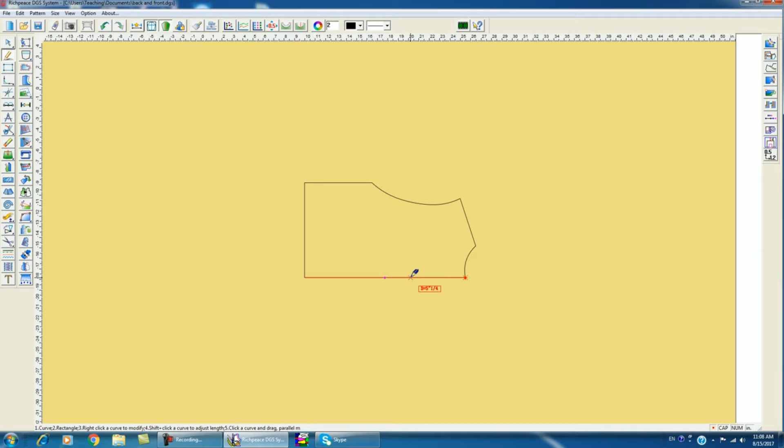First of all, we need to make a new neck, so with the tool F key, we need to copy this line and move up. Hold down the line until you see two parallel curves, then type in 3.75 and press enter. Now we need to connect this line up to the shoulder line.

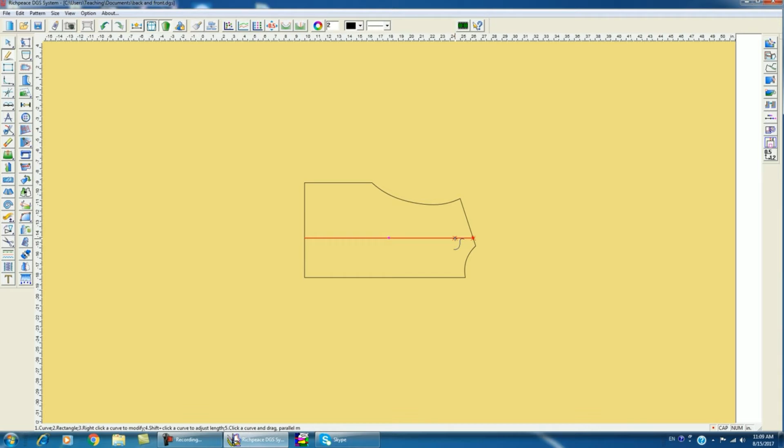Select this line and click, then right button to finish. Then we need to draw again the neckline. Put the cursor here, not here, here, type 1.75, enter. Now it is S. We need to change it to T by pressing right button, then you click here.

Now we want to make a neckline, so connect this point and make an S, connect this point, then press right button, put your cursor here and make a right button. Then it changes to the curve tool, click and move, and you can make the neck curve. If you are satisfied, press left button at any other place, then you are done.

Second thing we need to do is extend this center line up to 17.5. This is the first time to teach you this tool.

Put your cursor near this reference point, and by pressing shift key and at the same time press right button, it will show a dialog box to adjust the curve. The new length, as I told you, should be 17.5, and press enter.

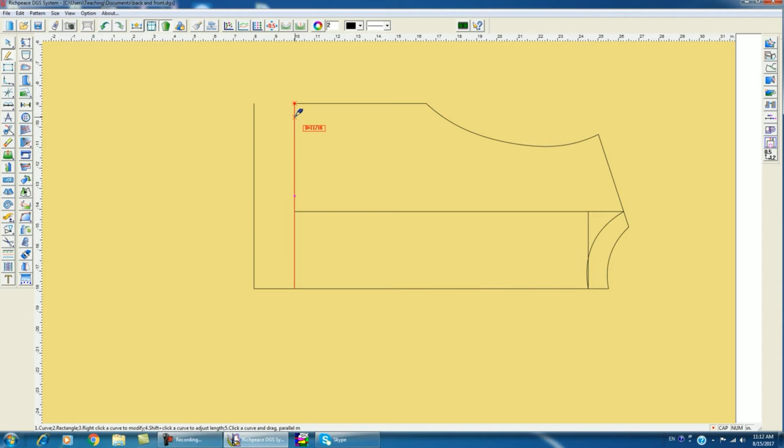Third, we need to make this one a little bit shorter. Same thing - put your cursor near the reference point, press shift key and make a right button, you will see the dialog box. Now we'll make 8.75 and press OK.

Now we make the tank top shoulder, so we need to make it shorter. But before that, we need to remove unnecessary lines. Drag these two lines, press delete key, and here we delete, and here we clear the corner inside and make a right button to remove this part. Drag until inside to remove this part, and press right button.

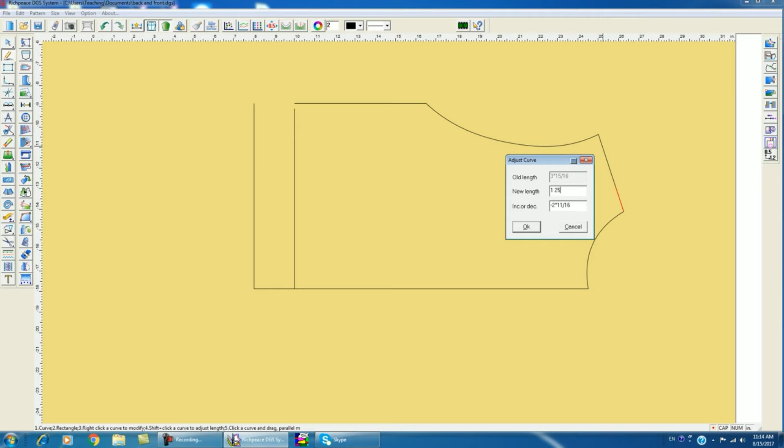At this moment we can make this shorter, and the moving point, the reference point should be here. Put your cursor near the reference point, press shift key and make a right button. It will show a dialog box. Then type in 1.25 at new length and press enter.

Then it became shorter. Now we need to draw from here. Make a T, and the distance should be 9.5. Press enter.

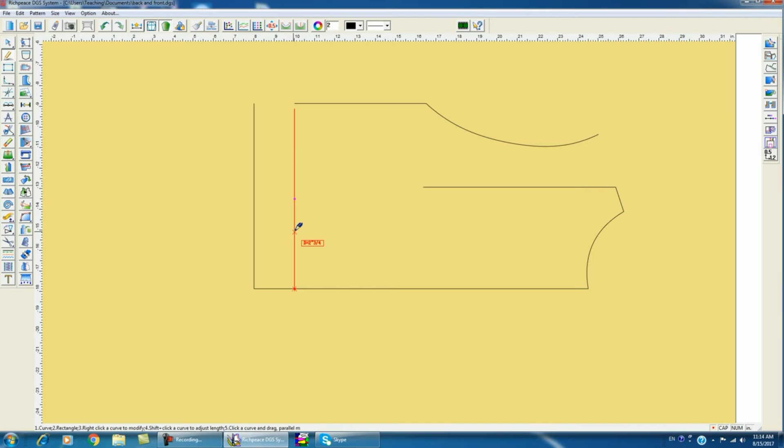Now we need to make a copy of this one, so we need to move this way, and you snap here. Press enter.

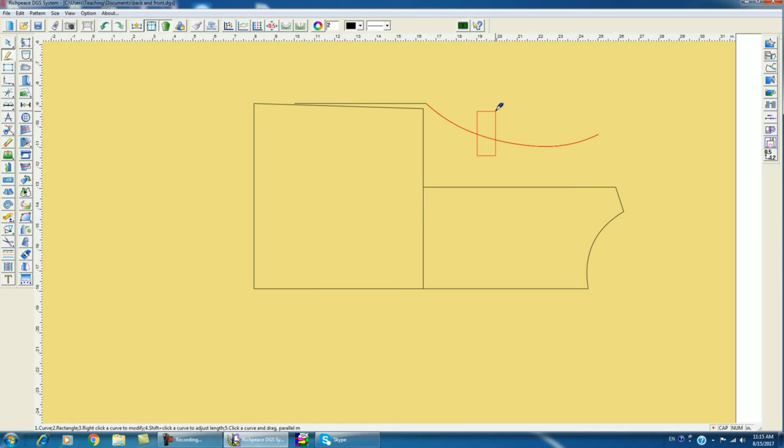Now we need to connect this line to here, click, make a right button. Actually you don't need this line anymore, so select and delete key here, select and delete key, select and delete key.

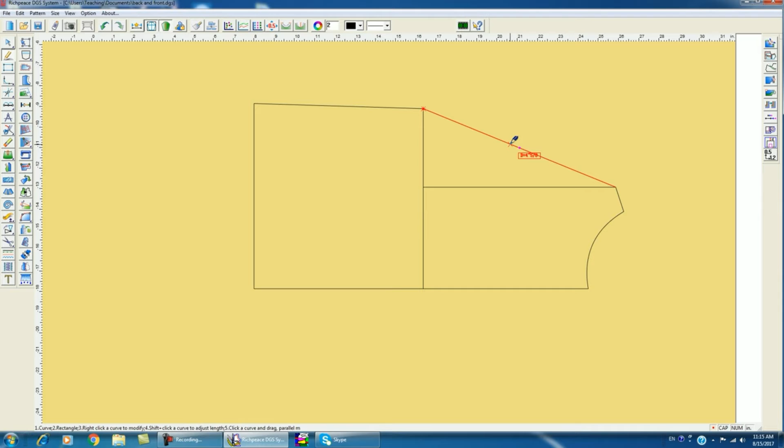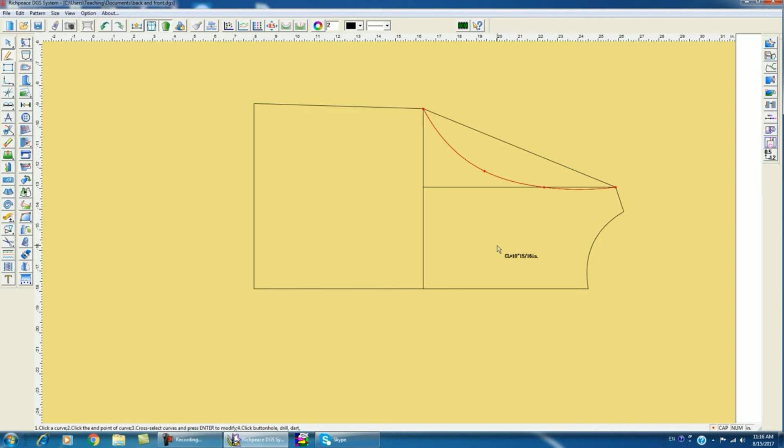Now we need to make a new armhole, so we connect this one and this one, and press right button. To make a curve according to this line, press right button and click and make a curve. You can use 2 or 3 points to make the curve as much as you want. If you're done, press left button at any other location.

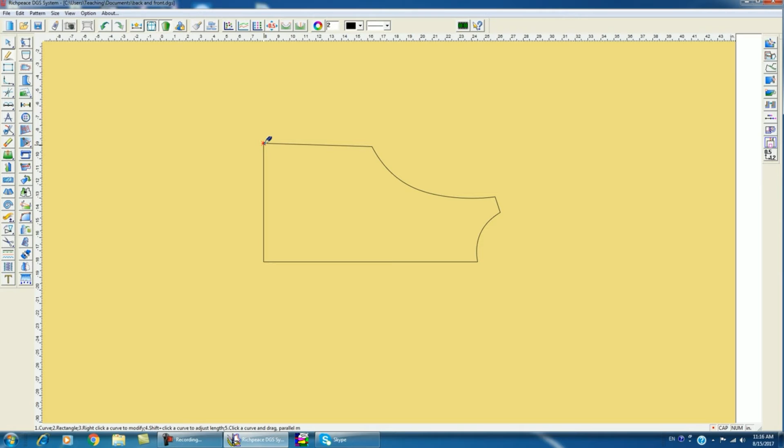We need to remove this line, select and press delete key. Then now you have this one, and also we need to move this point around 1.5 inch to the right.

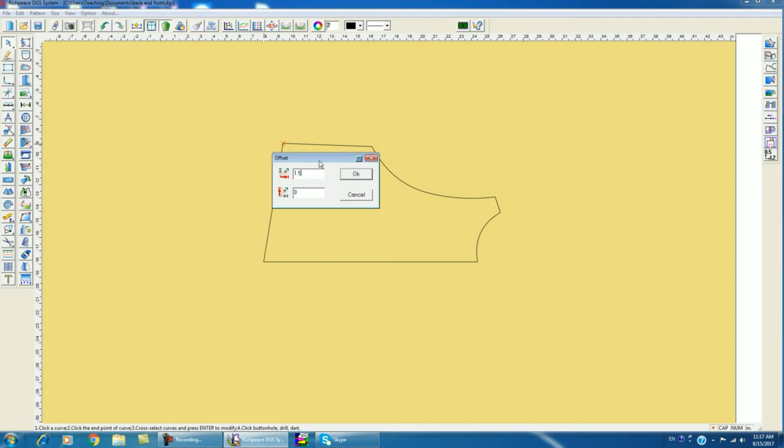We need to change to the A tool, put the cursor on here, press enter. Then it will ask how much the point should be moved. At the X direction, 1.5, and you can see before you press OK. If it is correct, then press enter or press OK.

Now we need to make a curve here, so it is already the tool - just click and one more click and make a curve.

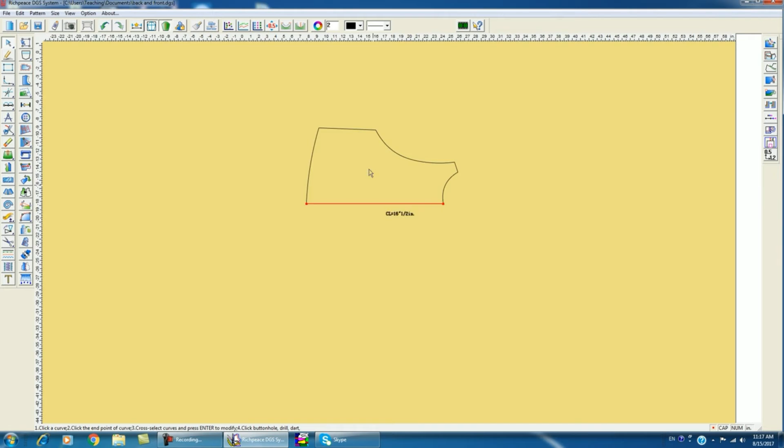And that's it. Okay, and with this one I want to make a pattern piece. To make a pattern piece, use the T tool, select the whole piece, and the color will change to gray.

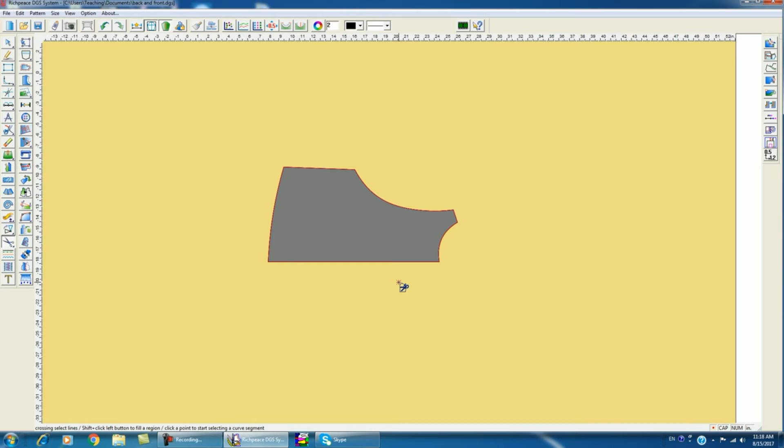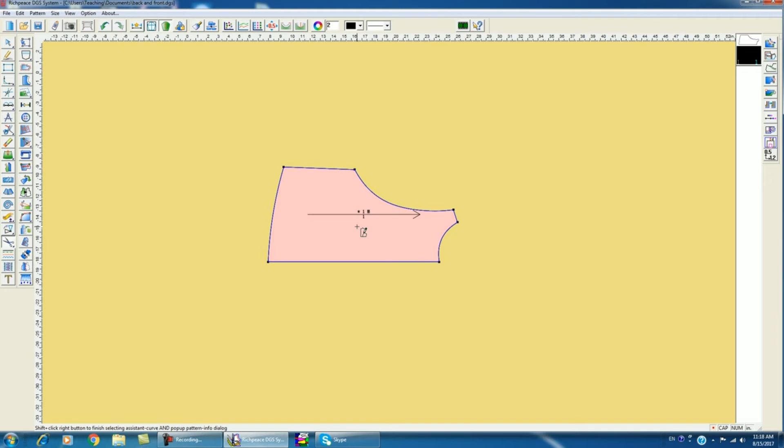Then you press the right button to finish, it turns orange, and you put the cursor on this piece and hit the space bar. It changes to the hand shape. Just move the cursor, don't press anything, and the piece will be attached to the mouse so you can move it anywhere you want.

With this one I want to show you two things today. One is to unfold. If you look at the toolbars, there are two lines of toolbars on your left side. The leftmost one is mainly for the design. You can still use some of the tools for your patterns, but most of them will be used for the design.

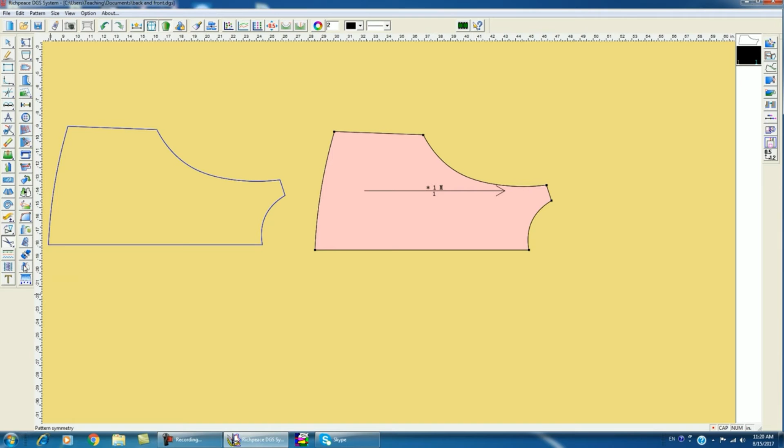The next one, these tools are almost all for the pattern - modify, seaming, grain line change, whatever. So today I want to show you two tools only: the right side tool, and from the bottom, the second one, called pattern symmetry.

The shortcut is Shift X. Click this one and it will show you three options. If you click the first one, and then click the symmetry line, it unfolds.

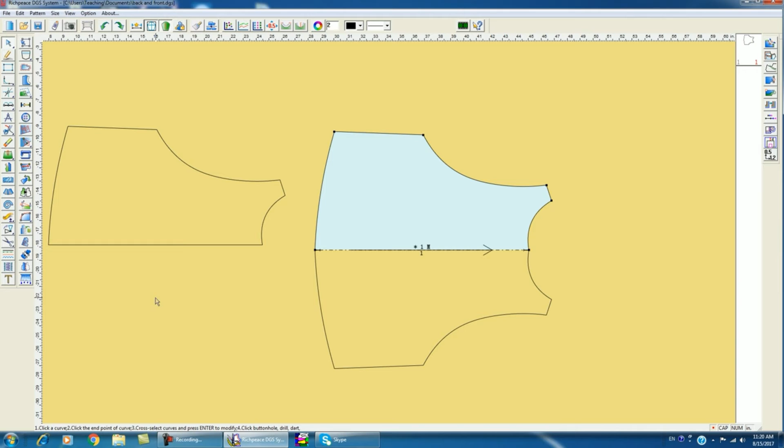This is good for two changes at once. For example, if you change the top part, the bottom part will be changed also at the same time. So I'll undo, and the first option is that one - unfold but symmetry unfold. So if you change the upside, it will affect the downside too.

Second one, this is to make a fold. If you click here, it shows the fold sign. There is an option called 'move grain line to axis,' so the grain line moves to this axis.

So if we open at the marking, the grain line should be at the center - that's why they use this option. If you don't like it, uncheck and apply, and then we can move this grain line anywhere. I'll do it again.

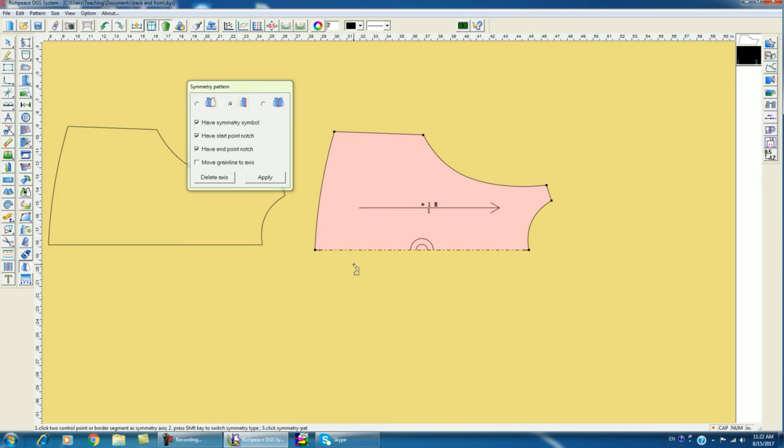If you don't check here, just click this one - the grain line stays here, and it just makes a fold sign. That was the second one. I'll undo, and the third option just opens it.

So if I click here, it opens. There are three options: one is unfold with the symmetric, the second makes a fold sign, and the third opens it regularly - it doesn't have any special function.

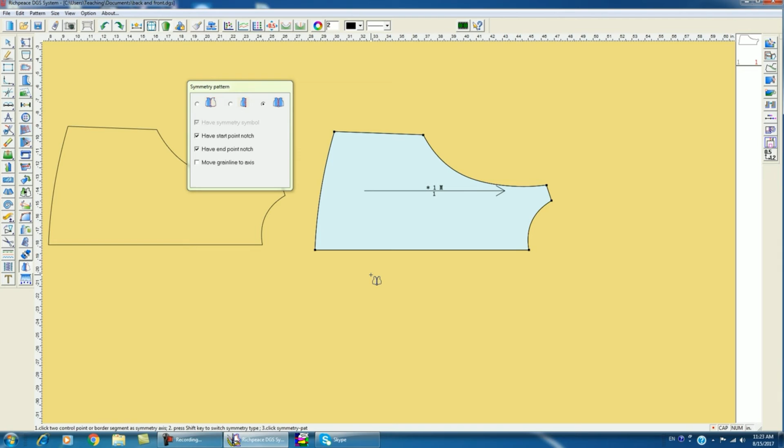Okay, just open. And the second one I want to show you is the Seam tool, shortcut S. If you press S and click any point - not the line - it will show you a dialog box and you type in 3/8, and it will ask whether to apply to only the selected pattern, all patterns of the work area, this area, or all patterns of the style.

There's only one pattern here, so it doesn't matter which option. If you click OK, you will see the seam line. But if you cannot see the seam line, press F7 - that's the toggle to show you the seam line or not.

That's the F7. If you want to clear this seam line here, that means this part should be 0 seam. So you press 0 and press enter, then you can see S equals 0 - that means whenever I clear the line, the seam will be gone. If I click here, the seam should be 0.

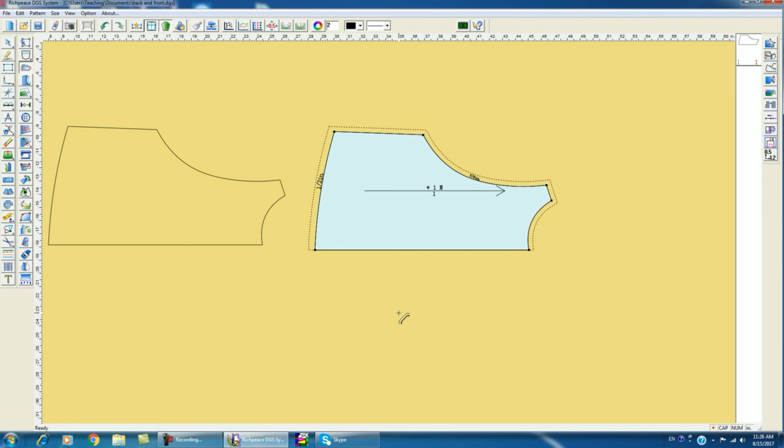So I taught you two pattern tools. The first was unfold, shortcut Shift and X, and the second I showed you was seam, shortcut S - you click here and put in all the seam amounts, either for all the pieces or only the selected pieces. I think this is all for today. Thank you.